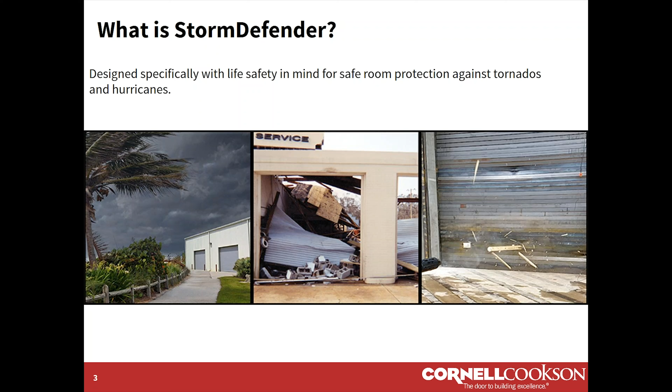So I'm sure you're wondering, why was the StormDefender door created? So the US experiences more tornadoes than any other country. And the most intense tornadoes are actually increasing in frequency. So in 1965, the worst outbreak expected over a 5-year period was 40 tornadoes. And in 2015, the worst outbreak expected over 5 years was 80 tornadoes. So as you can see, it actually doubled. So because of this, safe room construction has risen, and so did the request for tornado doors.

So now I'm going to pass it off to Heather Bender, and she is going to go through the code listings with you. Thanks, Tiffany. So as a kind of continuation of, why was the StormDefender created?

The StormDefender has a code-driven component. You may have seen the ICC 500 and the FEMA 361. Standards can be confusing, so I want to talk about the differences between FEMA 361 and ICC 500. Again, you may see them together or separate. You may see requests for tornado doors, but usually when requirements or standards are involved, you're always going to see ICC 500 or FEMA 361.

So years ago, FEMA created the P361, that's Publication 361, and it was guidance for safe room construction for those who are in areas of high occurrences of tornadoes or hurricanes. As time went on, like Tiffany said, storms getting more violent, more frequent, and after some particularly tragic events involving schools, the ICC, International Code Council, stepped in, took what FEMA had done in the 361 publication and codified it in the form of the ICC 500. So that's where it becomes mandatory.

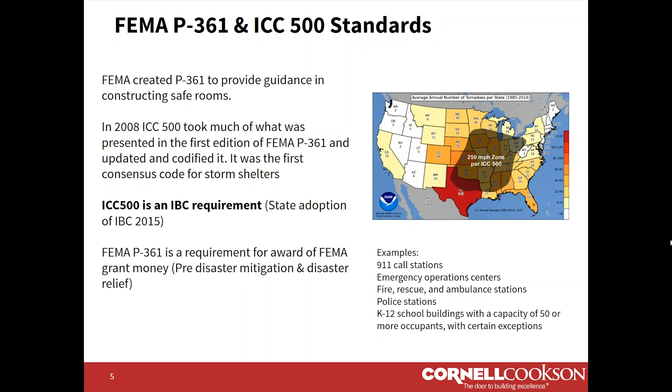So our standard Florida impact doors are 50 feet per second with a 9-pound 2x4, and that's what you'd consider your standard Dade County door or Florida or TDI door, and that equates to about 35 miles an hour. The most recent Florida building code change for enhanced buildings, which would be your critical facilities, hospitals, fire stations, police stations, would be a Category 4 building, and they increased the impact speed to 80 feet per second, which again is somewhere about 50 or 55 miles an hour.

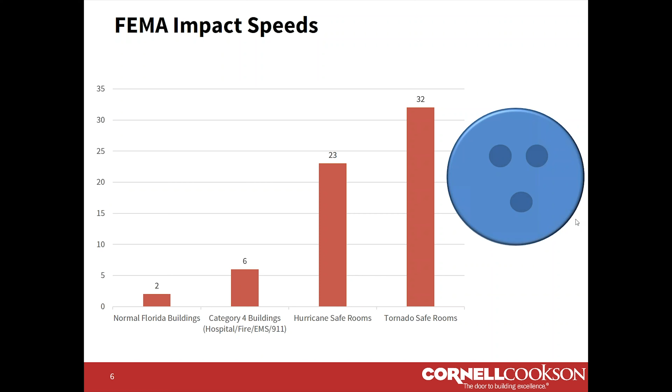And in addition to that, there is funding available. So when I said that there was a difference between FEMA 361 and ICC 500, there is a slight difference. Although ICC 500 is basically based on the guidance from FEMA, FEMA is a little bit more stringent. So for example, they need to have more first aid kits per person, or small changes like that make it just a little bit more stringent. And if a school or an organization wants to submit for funding, they need to be compliant to FEMA 361, and they have to fill out all the paperwork and all that good stuff.

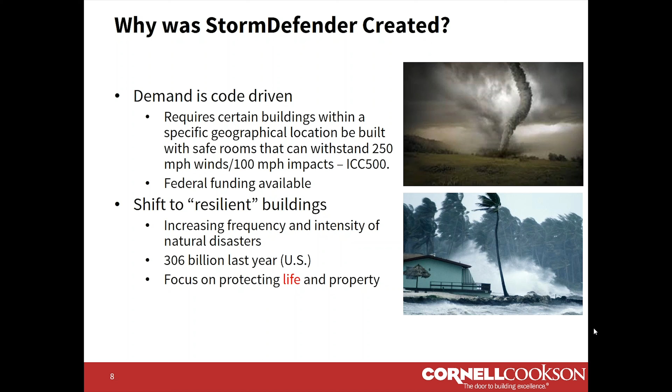Okay, so next we have just a very brief FEMA testing video that we want to show you. So this is just a representation of the stringent testing that it goes through in order to meet the listings that our door meets. So I'm just going to play this for you.

Okay, so again, that was just a brief snippet of the stringent testing that our StormDefender door has gone through in order to have the ICC 500 2014 listing that it does have.

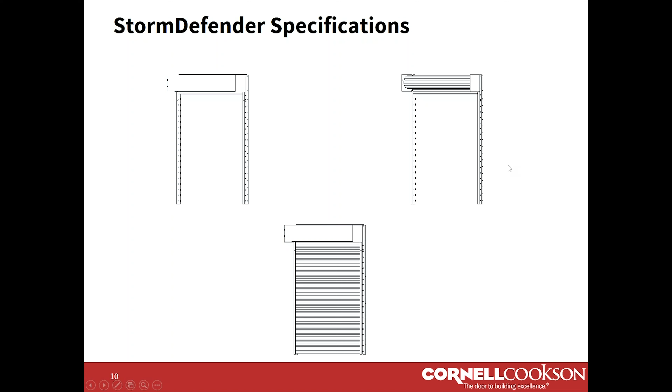So next we're going to move on to the StormDefender specifications. So we're going to start with the size limitations. The minimum door size on this is 3 foot by 3 foot. The maximum is 14 foot by 16 foot. And those are definite. So a lot of times you'll see some wiggle room one way or the other. On this door, those are the sizes as far as minimum and maximum.

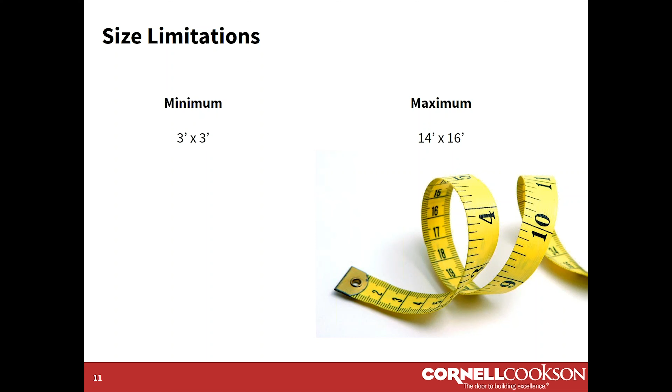Next, we did a little bit of a side-by-side for a StormDefender slat and a service door slat. So the StormDefender slat is a 12 gauge 4-inch single slat. And as you can see, we did the side-by-side to show you the difference of a StormDefender versus a service slat. So there is quite a difference when it comes to the size.

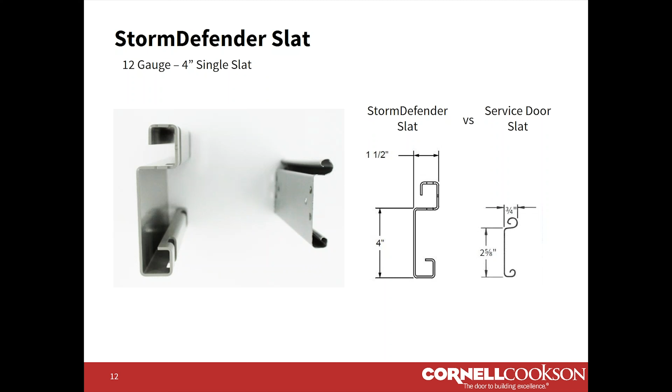Next, the StormDefender bottom bar is also 12 gauge 4-inch single slat. This bar provides a uniform appearance with the rest of the curtain. There's also a 12 gauge reinforced piece that's inserted into the bottom bar for additional strength. And also there is no locking required once the door is closed.

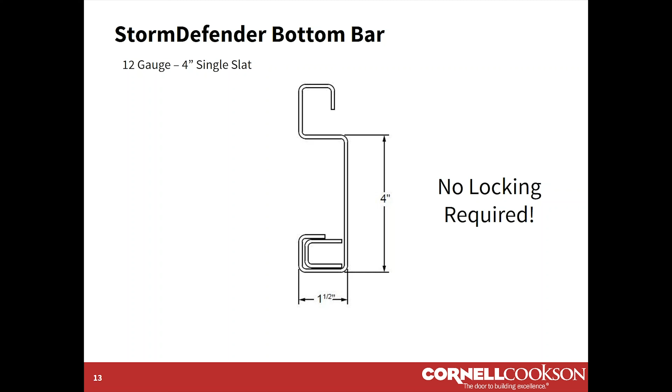So next we're going to talk about finishes. The standard finish on this door would be steel with a gray Spectra Shield powder coat, but then we also offer optional finishes, which would be stainless steel, any of the other Spectra Shield powder coat colors, and then we also offer our weather-resistant Atmo Shield powder coat.

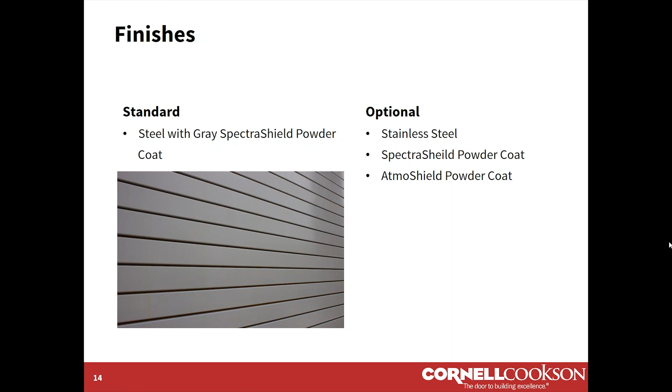I see we have a question, so we can address this now. The question is: is this the same door as the Riot door? So Trevor would be a good one to answer that. Yeah, so what's being referred to there is our Entry Defender model, which will be coming out in the future. The base construction is extremely similar. There are a few additional features on the Entry Defender door to meet the requirements for the forced entry resistance. And we can detail that at a later date. Okay, perfect. Thanks, Trevor.

Okay, so next we're going to talk about the specialized end locks. So the end locks on the StormDefender door are similar to our standard end locks, but these can be installed in the field without any special tools, rivets, or hardware. Also, the only time that they would be installed in the field is if the door was ordered unassembled. The only time someone is ordering a door that's unassembled is due to the lack of proper heavy equipment or due to space restrictions with getting the curtain in. Otherwise, the end locks will come installed on the end of the curtain slats.

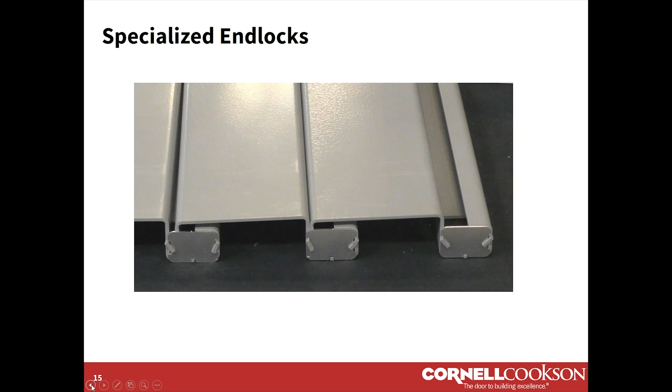Next, the specialized wind locks. So the wind locks are cut into the ends of each of the slats, so they're engaged in the guide, and this is what prevents the curtain from pulling out of the guides during extreme wind.

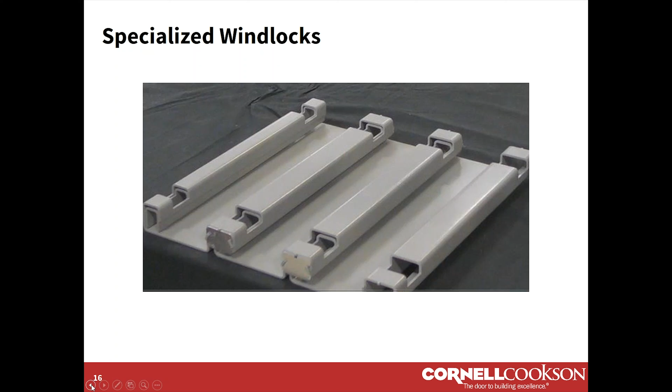All right, now we're going to show you another brief video on assembling the curtain and specialized end locks. Again, this is only going to need to be done in the field if the customer orders the curtain unassembled. Otherwise, this will come to them pre-assembled.

Okay, so as you can see, the end locks are really easy to install, but the only way they're going to have to do that is if they do order the curtain unassembled.

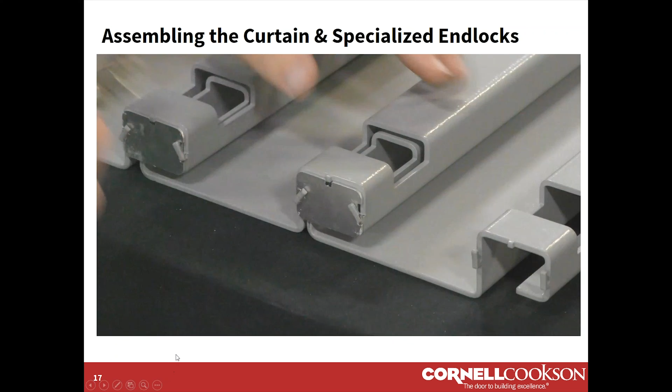So next we're going to talk about the operating system. The StormDefender door comes standard with the AlarmGard operating system. So this allows the door to be connected to the building's alarm system or to default to the secure position under a power failure.

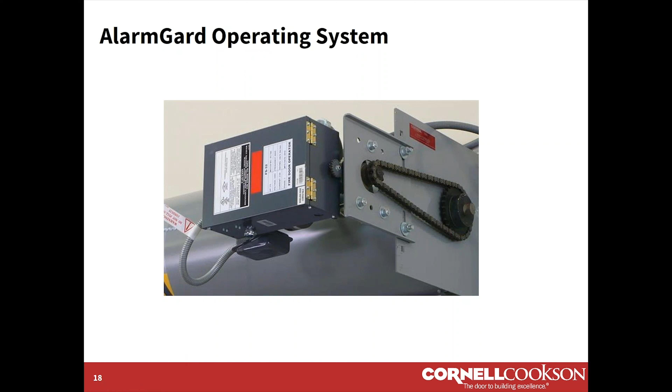Okay, so the StormDefender door can only be installed face of wall. Here we're showing you 3 guide construction options. So we have the Z guide, which is typically used to mount masonry. We have the tube guide, which is typically used with steel jambs.

And then we also have the tube guide with shims. So this would be provided in the case that the mounting surface is uneven. And the shim should be inserted between the guide tube and the jamb structure. And the maximum thickness for the shims is 3/4 of an inch.

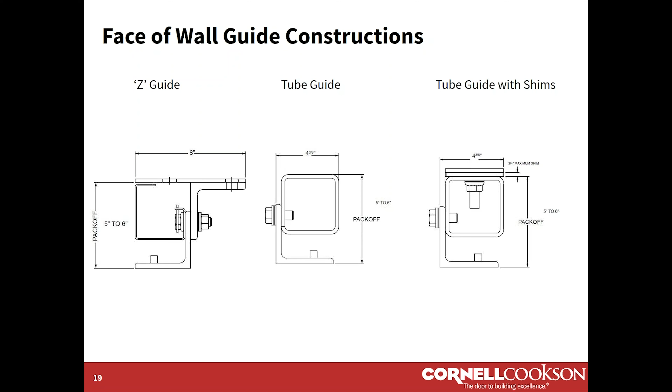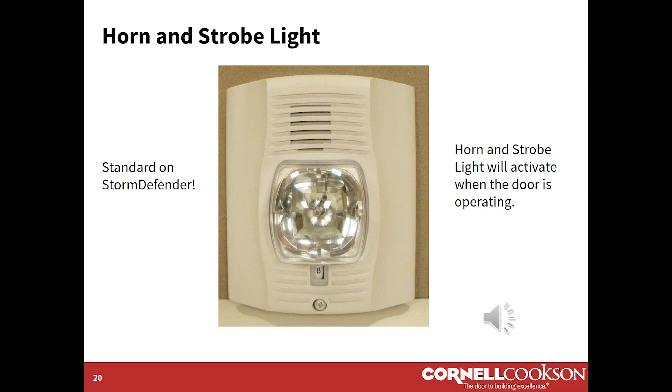The horn and strobe light does come standard on the StormDefender door, and this will activate when the door is operating. Some additional information that goes along with this door: it does have a lifetime cycle of 5,000, our standard 2-year warranty, and currently this is shipping from Mountaintop, Pennsylvania.

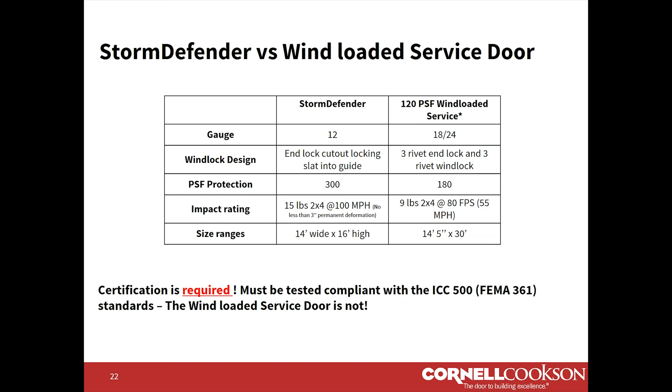Heather had touched on this briefly before, but just some applications for the StormDefender. It would be used over banks of windows, service areas, large space separation, counters, all in non-egress situations. The most common applications for these would be a K through 12 school, first response, community shelters, and then some secondary would be secondary education, mobile home communities, museums, and energy utility buildings.

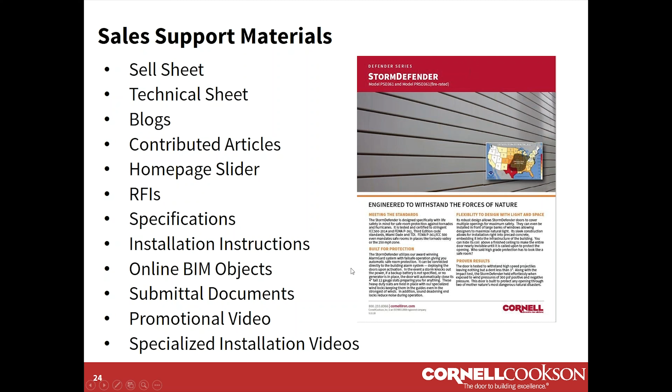Okay, so that concludes all the information that we have for you. I don't see any questions here that we haven't answered yet, but I'm going to give everyone, oh, there we go. We have some coming in. Hold on one moment. We answered that one.

Okay, so how much additional labor installation time does this door require versus a standard service door? How much heavier are the StormDefender door guides than a standard service door? So I'll start with the weights of the guides. The box guide or tube guide is probably similar weight to a medium duty wind-loaded service door guide. And the Z guide is similar in weight to a heavy duty wind-loaded service door guide.

So kind of based on your size range, the Z guide would be equivalent to a much wider, higher wind load door in like the 20 to 25 foot range, and the tube guide would be similar to a guide in the probably 14 to 16 foot range. In terms of the installation time, because the curtain is coming wrapped on shaft, that should save you a little bit of time in terms of installation.

And then in terms of installing the anchors, on a Z guide, there are quite a few. So I would probably say estimate 1.5 to 2 times the amount of time that would take you to drill the holes into concrete. And then for our tube guide, they're just welding up the tube to steel structure. So that should be very similar as if you were welding up a standard box guide.